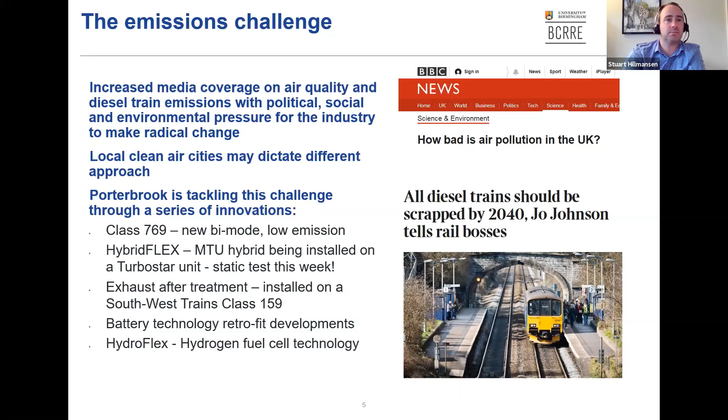Next slide, please. One of the key factors affecting whether we can use hydrogen or not is also how our energy generation mix is changing in the UK. So you hear in the news often that our mix of power generation is increasingly becoming renewable. We're forever hitting records of the amount of renewables being fed into the grid, and this is going to continue, and by 2050 the grid should be zero carbon.

So it doesn't really matter how much electricity is used, because it will then have no impact on carbon dioxide emissions, and therefore, you know, we can use as much of it as we like to some extent. It just becomes an economic commodity, doesn't have an impact on the environment, which will be a great place to be. Next slide, please.

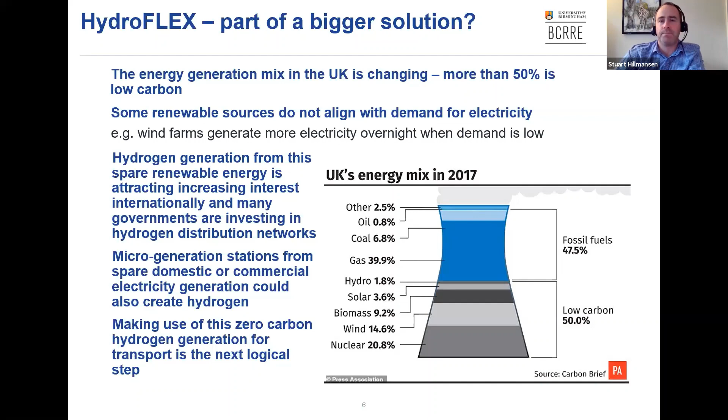Hydrogen is already a mass-produced gas. There's huge quantities of it produced globally. Most hydrogen is used pretty much immediately to make things like ammonia, which then go into other chemical processes. So you use hydrogen to make nitrogen-based products, which are used for fertilizers and things like that. So there is already a hydrogen industry in the UK, but most people aren't aware of it.

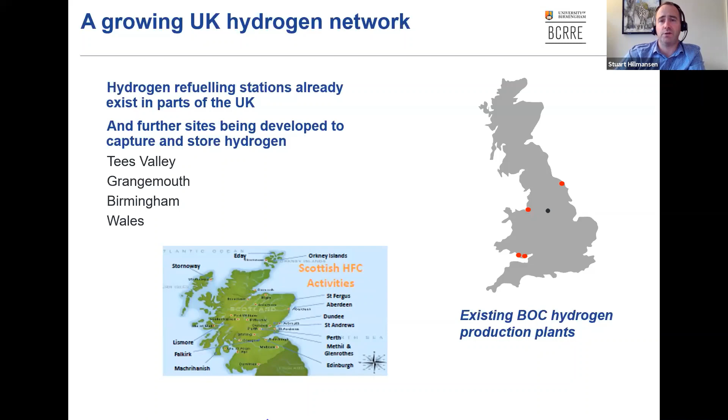And there's also hydrogen used for transport, and you may know about the Tees Valley project. So there's a huge investment going into Tees Valley to produce a hydrogen hub, with lots of demonstrator and prototype vehicles going to be running out of there. And then other places also dip the toe in the water in terms of running hydrogen vehicles. Next slide, please. And here are some of the example types of vehicles that are in service.

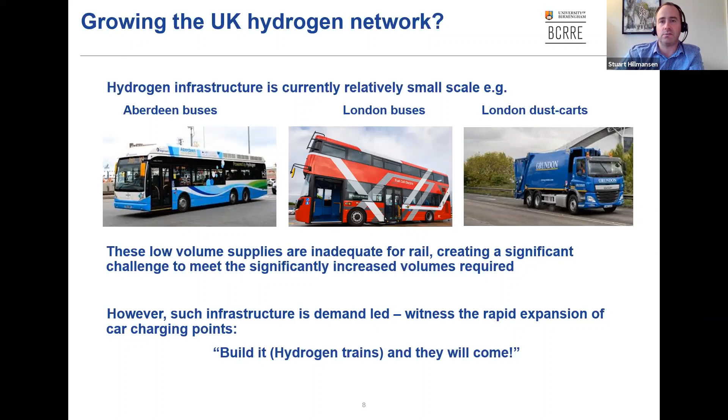So there's been buses running in Aberdeen for a number of years now, also London buses and things like dust carts and so on. So these are kind of ideal examples of applications of fuel cells, because you have a vehicle which is heavily utilized and returns to a base station each night, and can get refueled for the next day's operation. So we're very much taking technology of this scale and translating it into rail applications. So we're borrowing from the bus sector and automotive sector and translating it into railways. Next slide, please.

At the university, before we developed the partnership with Porterbrook, we realised that this challenge was coming, and we thought that hydrogen could be used as a fuel for railways. And we started doing concept design work and early calculations of what exactly hydrogen could do for railways. And we've done lots of paper-based exercises, and that's led to small-scale demonstrators and then the HydroFLEX project eventually.

An important thing to realize is hydrogen is an energy vector. So it doesn't exist, we can't dig it out of the ground, it doesn't exist on its own. So we have to make it, or we make it from a feedstock such as methane. If you do that, then it does have a carbon dioxide penalty, and you might want to bury that carbon dioxide or release it to the air, and that'll have a very different impact on how green the hydrogen is. But ultimately, you can produce hydrogen from electricity, and if that electricity is zero carbon, then you haven't used any carbon in the production of a fuel which can be used for mobile applications.

However, if you're using electricity to make hydrogen, then putting it through a fuel cell to make electricity again, you throw away about two thirds of the electricity or thereabouts, which means that you're wasting a lot of electricity.

So this is a good point, and people say, why don't we just electrify everything? But then that goes back to the picture I showed you at the beginning of the presentation. Many of our lines are in quite rural places where you only have a small number of trains per day, and it just wouldn't be economic to recover the cost of electrification in the really rural parts of our railway. There simply aren't enough people travelling on it to justify the huge costs of electrification. That's not the case if you've got a very busy, high performance railway - electrification is the answer there. So we're looking for answers on railways which are quite rural and remote, but equally they're very important parts of the railway.

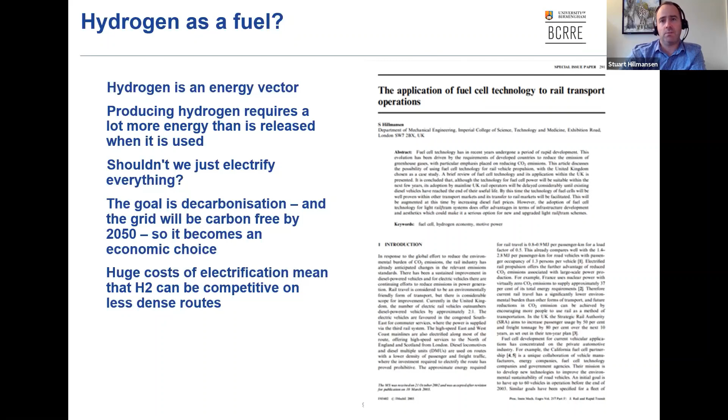So next slide, please. And the next one.

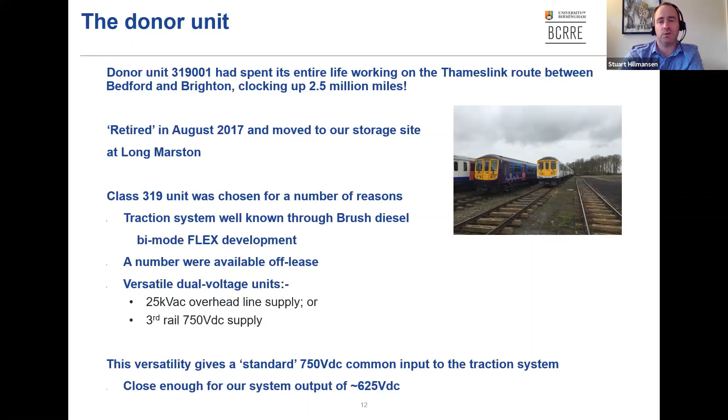So it sounds quite easy, and it sort of was quite easy on a concept level, but there's a huge amount of detail and nitty gritty that's involved in getting it actually working. So next slide, please.

We had to do this really quickly. We decided to put the equipment inside the vehicle because this was a prototype. We didn't want to have the headache of engineering all of the components to go underneath a vehicle, which would be the preferred solution for a vehicle in service. So what we did was take out the seats from this vehicle, the MSO, which is the motor standard open - this vehicle carries the traction motors on board and all of the converter equipment used to power the traction motors. We took all the seats out of that and installed the fuel cell, the battery, the hydrogen storage tanks and the control system, and had some space for Ross and I and a few other colleagues to sit and monitor everything.

So there are two reasons. One, this was a lot quicker to do the engineering this way, but crucially, I think the main reason or the main benefit of doing this was we were able to show lots of people inside the vehicle and give them a tour of the vehicle, show them around, and allow them to poke things.

Obviously there was no exposed high voltage stuff anywhere, and that was very powerful in terms of allowing people to see what the fuel cell looked like and what the storage tanks looked like, and so forth. That was a major achievement in disseminating and demystifying a lot of things about hydrogen tanks. Several thousand people have probably been in the vehicle to have a look at it, and probably several thousand have actually had trips on it as well, because we ran it in Long Marston for a number of different events, and it got a lot of interest, including a trip with the Secretary of State for Transport, Grant Shapps, riding on it when we took it on the main line.

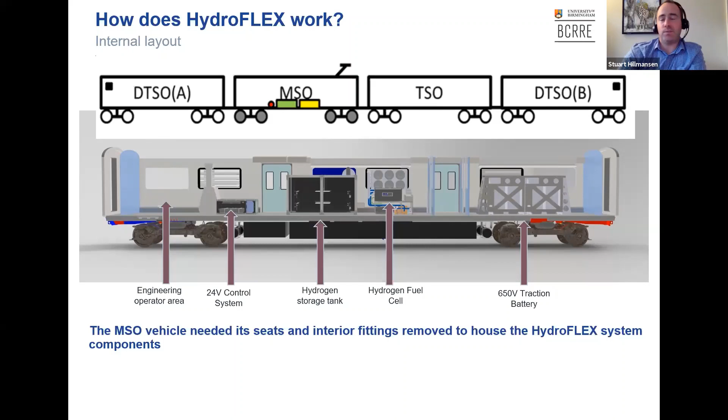These are attached to really strong parts of the train, which are basically used to mount the seat railings. So we mounted all our equipment on existing mounting plates, and there was some strengthening work that we needed to do, and all this work was done to various railway group standards. Although the HydroFLEX vehicle only did 75 miles, it had a fatigue life of 25 years, and would survive all of the various extreme loading cases that you might have on a rail vehicle.

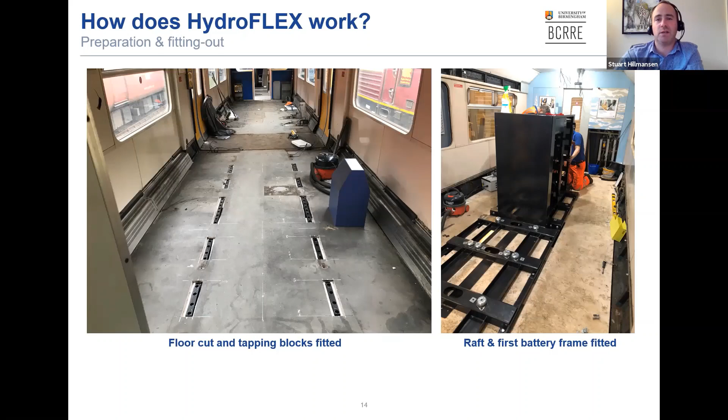5 kilograms of hydrogen does store a huge amount of energy, and it's much better than you'd ever get out of a lithium-ion battery. That's one of the reasons we're using hydrogen in the first place. However, the volume of the tanks and the mass of the whole system is much greater than what you'd get for diesel. That's one of the challenges about a hydrogen vehicle: you can't go head to head with a diesel vehicle and get the same performance in terms of power or range out of a vehicle running off hydrogen. So we need to be more clever about how we're going to use it, and perhaps as this vehicle is fitted with a pantograph, it's possible to use the pantograph on the electrified network and then use the hydrogen fuel cell to run off the end of the wires when you haven't got the overhead there.

These tanks are designed to EC 79. This is a standard taken from the bus sector. Right now there's an IEC committee working on standards for railway applications for fuel cells and hydrogen storage systems, and I'm actually sitting on that panel for the vehicle system part of it. So stuff is moving rapidly now to make this commercially viable and be able to be deployed on a wide scale. Next slide, please.

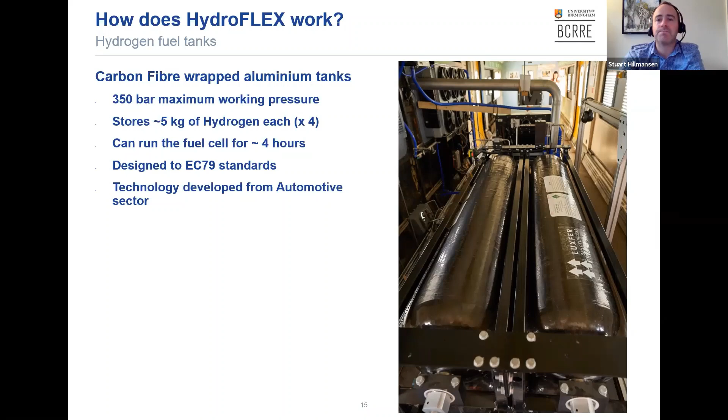We spec the radiator to deal with ambient conditions of about 40 degrees, and we would have been able to run the fuel cell at full power with air at 40 degrees. It is a challenge cooling fuel cells, but something we've developed expertise in.

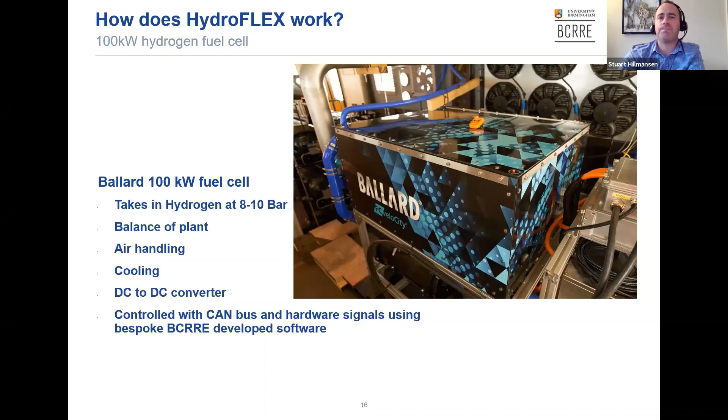The battery was much more complicated than the fuel cell. There's far more components in the battery, and a huge amount of inbuilt protection in a battery system such as this. We had to do quite a lot of work making sure the battery was happy in a railway environment, because initially it wasn't.

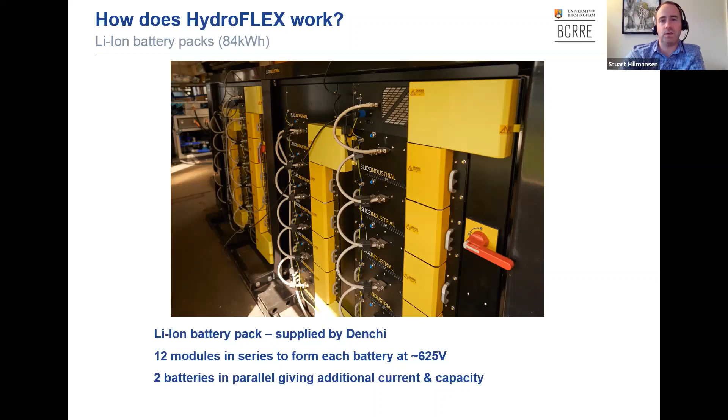A railway traction environment is very, very aggressive. There's quite a lot of electromagnetic noise about as well, and this battery is trying to look after itself, and we needed to make sure it was robust enough to work in the rail environment. So it caused us probably quite a lot of issues integrating it into the train system, which we overcame in the end.

So how does a fuel cell work? Probably should have said this right at the beginning. A fuel cell works by pushing hydrogen into the fuel cell as a gas. Then there's a catalyst, an anode catalyst, an electrolyte, and a cathode catalyst.

Air is pushed into the other side of it, and then the hydrogen lands on the catalyst and turns into protons and electrons, and the protons then go through the membrane, called the proton exchange membrane. Protons go through it, go to the other side, because they're attracted by the oxygen ions over there, and they join together with the oxygen ions and form water.

So we get a waste product of water, and the electrons have to go around the other side to complete the chemical reaction, and they travel through an electric circuit in order to meet the hydrogen ions and oxygen ions on the other end and form the water.

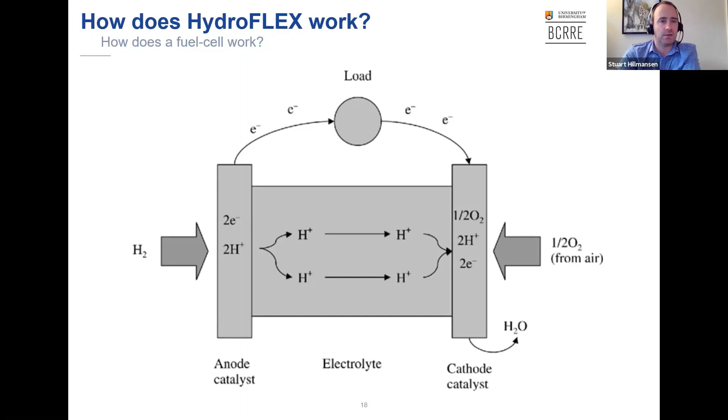So we can drive an electric circuit using this process. Fundamentally, it's more like a battery than a combustion process, and therefore can have much higher efficiency than a combustion process. That's why we don't burn the hydrogen in a combustion engine, because a fuel cell generally can produce higher efficiency than a combustion process.

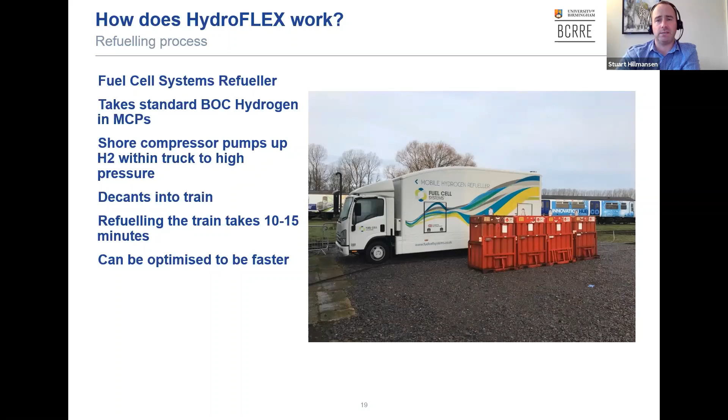The hydrogen fuel cell and the battery that Stuart's just gone over connect together in a T arrangement, with the bottom of the T going down to the traction system on the train. So that runs through the unit's AC bridge rectifier, and then through the GTO choppers, and then to the traction motors. Aside from this rectifier, it's a very similar arrangement to most hybrid cars, where the internal combustion engine and the battery work together to power the drivetrain.

I mentioned the rectifier. There was a reason we went through the rectifier, even though we were running DC. The AC side of the 319 traction system actually has a pre-charge circuit, which helped us to reduce any initial current spikes.

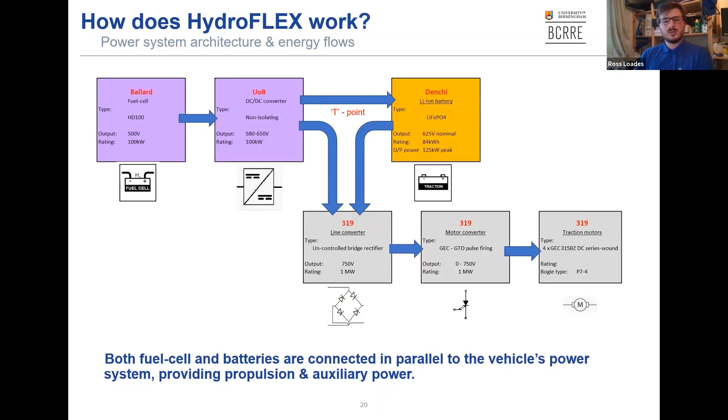Okay, so the Class 319 units are nominally 1 megawatt on AC or DC from the OLE or the third rail, and the traction control system is known to be quite aggressive. It does incorporate some closed loop control, as you can see on the screen, but it's quite basic, and if left standard, would easily overwhelm the battery and the fuel cell together, which would shut themselves off to protect themselves.

Fortunately, as Stuart has alluded to on one of his opening slides, we have the Flex project between Porterbrook and Brush Traction. So they use 2 diesel engines under each end of the train, and the 2 engines add up to a total of 780 kilowatts. So they needed to sort of control the power that the train was demanding to fit into the use profile of the engines. That's where we adopted that technology from.

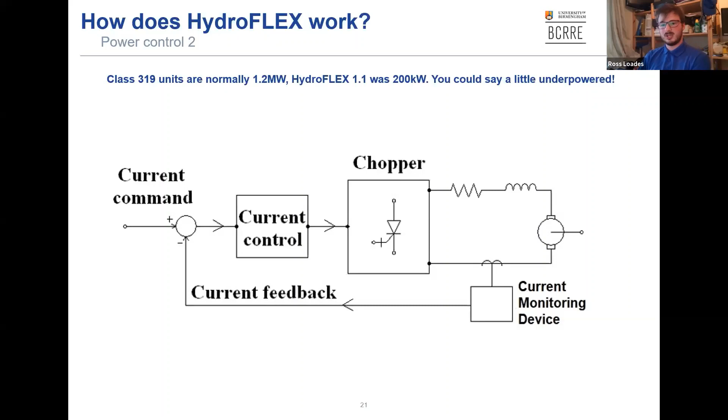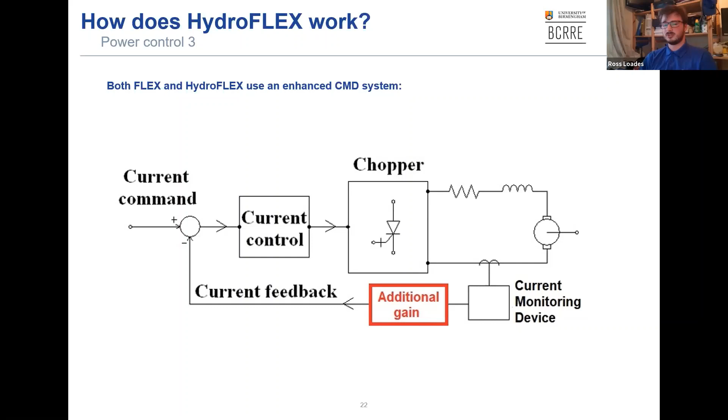So the Flex project uses an enhanced current monitoring device, or CMD, which inserts an additional gain into the feedback loop here. So this essentially fools the train's traction computer into thinking that it has the power that it's expecting, when in reality it doesn't, which allowed us to power a 1.2 megawatt train with just about 200 kilowatts. So that's how we did that.

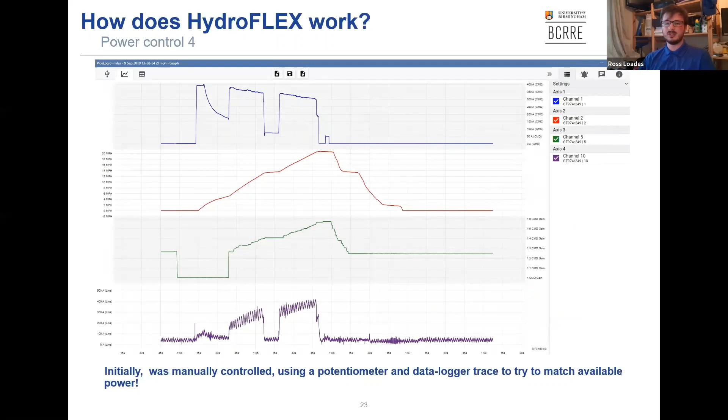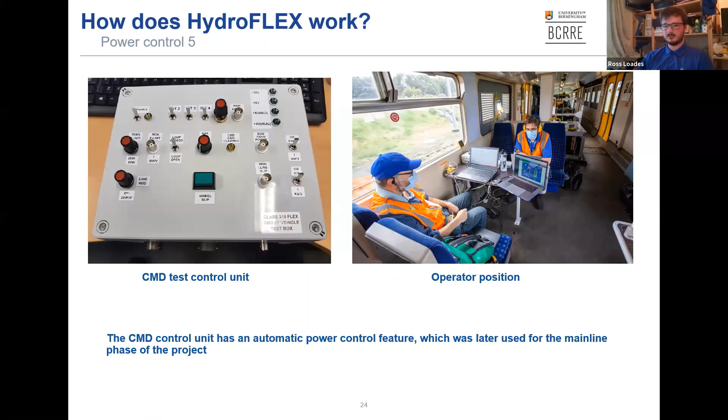So for phase 1, the manual gain control was fine, but the CMD system also has the ability to automatically control the gain to a set power level, and that's a feature that will become useful much later.

So we built the train, as Stuart said, in 9 months. We had a few weeks to test at Long Marston, and then it was time to show the train off at Rail Live. We successfully carried a lot of visitors on the train. We did short shuttles around the Long Marston site, and even had some early morning news footage on the Good Morning Breakfast on the BBC.

Rail Live testing done. It's now onto the bigger picture, which is mainline testing. So the initial conversion was only intended to run at Rail Live. So we then had a lot of work to do to get the train ready physically, and with lots of paperwork to run on the mainline network. Most of this second stage was funded by Innovate UK, which also had a target of Q2 in 2020. So yeah, we had some improvement work to do to the train and lots of paperwork to catch up on.

Q2 was the plan, but then this big pandemic hit, so that kind of affected things a little bit. So with COVID happening, we still progressed with the project, and we designed and developed the improvements to the unit, which included automation of the power control for both the fuel cell and the current monitoring device. We had some physical rework to do on the train, and then a completely new logic unit to be inserted in between the driver's power handle and the traction controller.

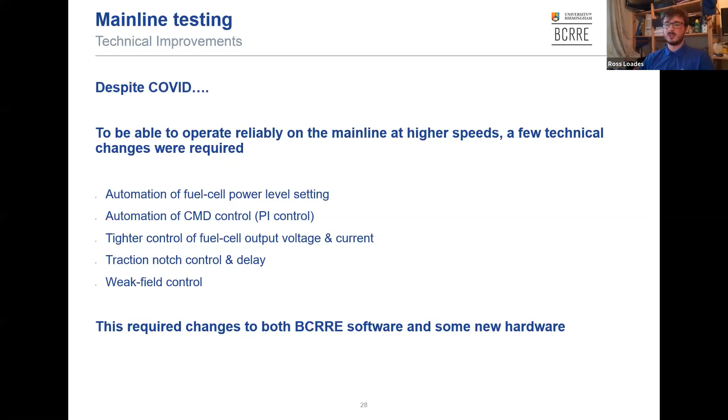So this is the new logic box that was designed. The first thing I want to point out here, before I go too much into what the logic box does, is that the principle of these was to not create any false signals on the driver's inputs, so that we couldn't control the train, we were just interrupting what the driver was doing.

So the new box essentially added a delay between what the driver was asking for and what the train was able to get. So this gave the fuel cell a bit of time to ramp up to the demand required, and it also changed the power level on the current monitoring device so that we had the right power level set depending on what power sources were connected.

The last thing in the box was some wheel spin control. Now this was done by backing off a notch on the power handle when wheel spin was encountered, and then if further wheel slip was encountered, it backed off again.

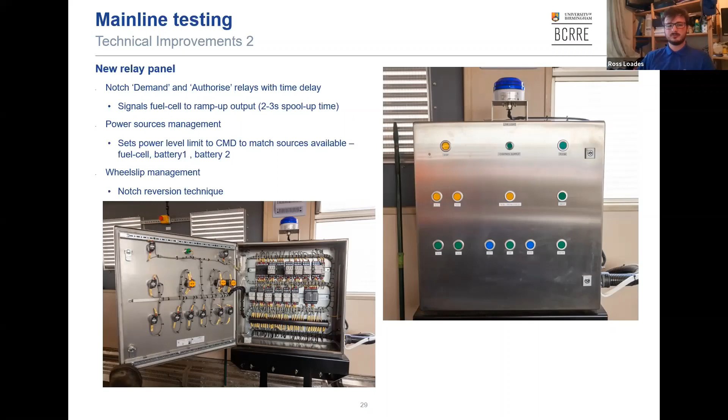So we successfully undertook all of our modifications, and we also got a lot of paperwork done, so much paperwork. So we had 175 hazards generated and closed out individually. There were 177 different pieces of evidence to go with those hazards, and then 102 technical integration drawings to show that this was designed and engineered properly.

There were also 2 hazard identification sessions with everybody invested in running the train involved, which generated the hazards. We also had a statement of compatibility to raise, which raised 69 technical questions, which were individually responded to. There were 10 comments on the statement of compatibility, and Porterbrook has an internal engineering change control process that had to be gone through as well.

But arguably the biggest bit about proving that a hydrogen train is safe to be on the network is the fact that it's the first one. As Stuart alluded to, there are no standards to govern hydrogen trains on the railway, so we had to adopt EC 79, as Stuart said.

The other thing, which you wouldn't really think about, is the perception of risk. If I talk to people about working on a hydrogen train, some of them make a comment about, oh, Hindenburg and hydrogen is unsafe, which totally isn't the case at all. We've gone through a lot of robust engineering and a lot of detailed thought on hydrogen to make it safe, and that's what the standards are there to do as well.

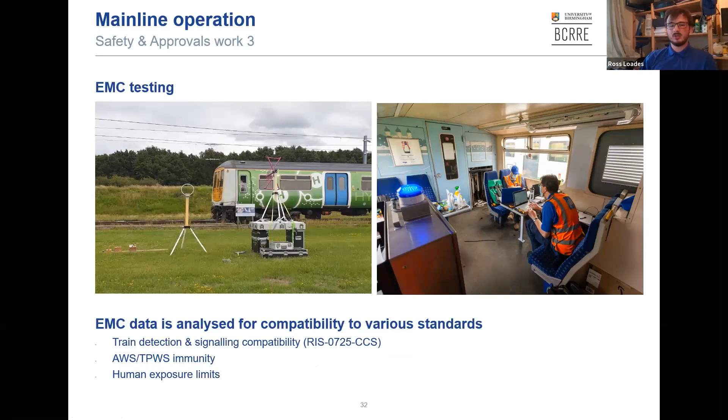So part of the compatibility work was to get the train EMC tested, which you can see on the left with some of the antennas they pull out to test the signature of the train. And there's my 2 colleagues, Ralph and Jeff, again on the right. So this is used to test the compatibility with the network for signaling, for the safety systems like AWS and TPWS, and to check that it's safe for people to actually be inside the train. So the next slide is a short video that I'll play, and then I'll carry on again.

So HydroFLEX is the UK's first hydrogen train. It's also the world's first bimode electric hydrogen train, and today has been a historic day because it's been the first day we have seen a hydrogen train running on the UK mainline railway, as we left here at Long Marston and went up to Evesham and back successfully.

It takes a lot of work to get a hydrogen train to run on the main line. There's a huge amount of safety approvals work that we have to go through. We had to formally document a lot of things, record things, assess the hazards, assess the risks. Hydrogen is really important in terms of being able to offer decarbonisation solutions to the rail industry, mainly because you can produce hydrogen from renewable sources by electrolysing water. And hydrogen is going to be used on the parts of the railway which are just not economic to electrify.

I can't describe how proud I am of the whole HydroFLEX team to get the first UK mainline hydrogen train working. It's been an absolutely fantastic project, and it's a personal highlight for me as a career, and also it's a real big step forward for the UK and decarbonisation of the railway.

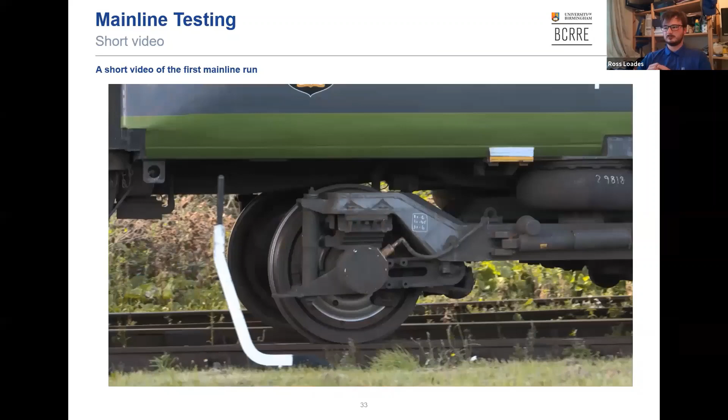One of the best things about being at the University of Birmingham is we do really, really good practical and industrially focused research, and we've always had a record of doing that. And we developed this partnership with Porterbrook just over 2 years ago, and Porterbrook, from my point of view, have been a really innovative company and willing to take a risk on the technology and working in partnership with us to get to where we are today with the HydroFLEX train.

It's been so exciting for the team to draw together all that work that we've put in and to see it running at high speed on the network, and more importantly to the industry to demonstrate this technology is the future.

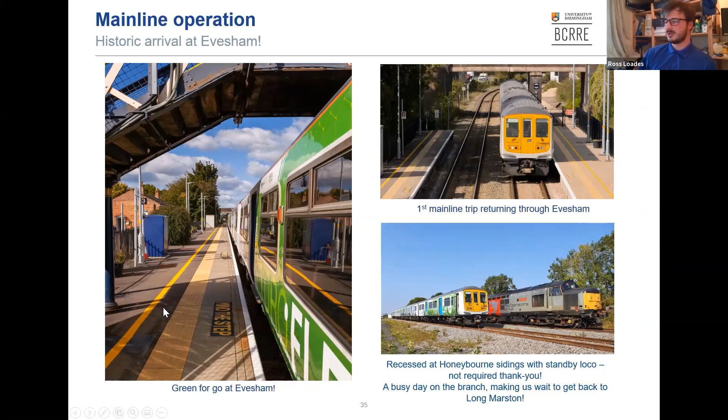And here's a data logger trace of that run. So you can see us there. We've got to 50 miles an hour. The logger trace says 49, but we know that there was a slight issue with the WSP input on that car. We know it's under reading by 1 or 2 miles an hour.

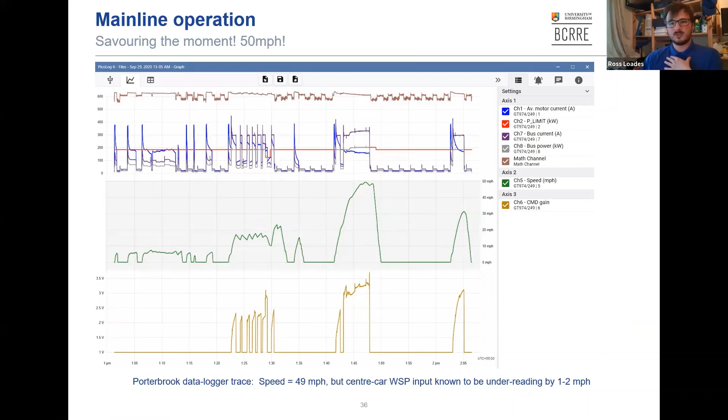So looking to the future. So we've done HydroFLEX 1, we've tested it on the main line as HydroFLEX 1.1, and now we're looking to HydroFLEX 2. So the next HydroFLEX is currently in development. We've secured more Innovate UK funding, and we're developing the production version, which now we're in development with the supply chain. It will retain its bi-mode functionality as being able to be powered from the overhead and from hydrogen. We're aiming to get 90 miles an hour out of it in hydrogen.

And we're aiming to be competitive with some diesel trains in terms of range. More of the equipment will be fitted underneath the train, but some will end up being in the first driving vehicle. That configuration kind of depends on the range you're going for. It will further be based on the Flex concepts used on the Class 769 vehicles that have just started running at Northern and at Great Western, and in Wales with TfW.

And we want to build on the project and really learn from it. So we can build these trains and then we can learn for new train projects in the future. And it also opens up the industry to working with new partners on the route to getting hydrogen approved for passenger use.